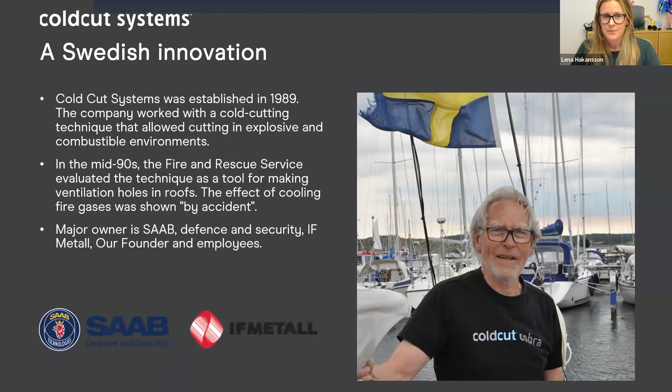Oh, that's two ahead. Sorry. Sorry, what's happening? Here we go.

So Coldcut Systems sells and manufactures the Coldcut Cobra, and we've done this for more than 25 years. So we have a lot of experience within firefighting, and the Cobra is used worldwide, though our main customers are within the fire and rescue services, and up to 90% of our users are within the fire and rescue services.

But Cobra is also used in airports and maritime environments, car production, and also where they put together the traction batteries, which we are going to talk more about later on. And Cobra is a tool to cool hot fire gases from the outside of the fire compartment. Sorry, it does not work.

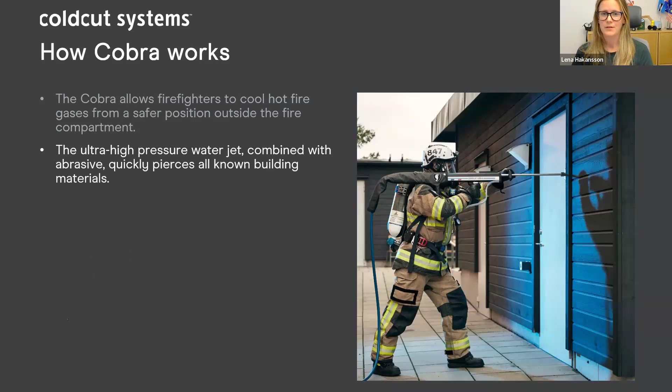So the ultra high pressure, it's 4,300 psi. This combined with the cutting media abrasive makes a quick piercing through all known building materials. And it pierces a very small hole, which allows for no extra oxygen to be added to the fire.

And once through, it makes a fine water mist that creates a large effective area that cools the fire gases very efficiently. And I'm sorry for this liters, but Cobra uses only, I think that translates to 15 gallons of water per minute.

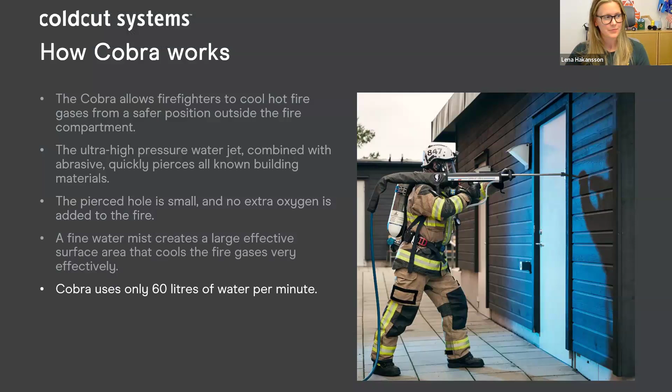So that water and abrasive mix travels through the hose to the handlance where the Cobra is operated, I should say. And number 5 is the control panel where we also can operate the Cobra. But mainly we use the control panel for starting the system. And we also have an emergency button. Additional or optional is number 8, the additive tank.

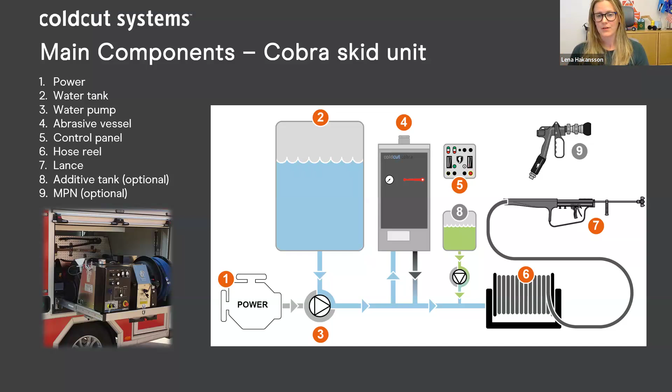And we also have the MPN, the multi-purpose nozzle, which is used for embers and smaller fires like car fires or trash can fires. The pressure is reduced from 4,300 psi to 1,200 psi, and we have 7.5 gallons per minute of water. So we have 2 different systems. One system that delivers 15 gallons per minute, and we also have a system that delivers 7.5 gallons per minute.

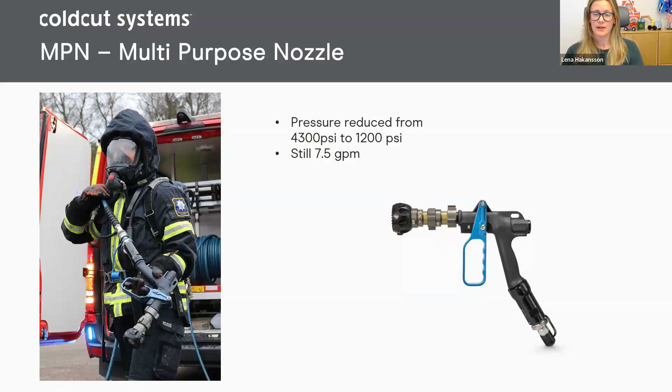We do also have training for our system, and basically it's the Cobra instructor course, where we do trainings for instructors. And when you finalize this training course, you become a certified instructor with the knowledge and ability to train your own crew to be Cobra operators. And after a certain time, you might want a refresher of the instructor training.

And also we have a Cobra captain course. We call it the incident commander course. It's more focused on risk assessment and decision making on how or when to use Cobra and why to use Cobra. And then our latest addition is the Cobra and EV battery fire course, where we of course talk about risks regarding EV fires and the potential to use Cobra as a tool to fight these kinds of fires.

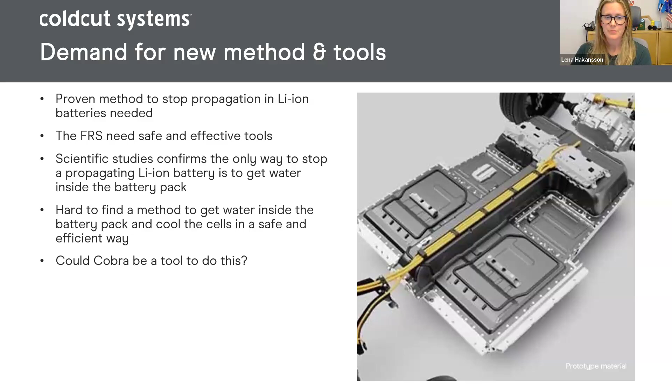So in 2021, we had initial tests that proved that Cobra could stop propagation by internal cooling. And we did these tests together with MSB and Volvo. And we knew that probably this method is going to work because more than 20 subsequent tests have been done by the EV car industry, and they had the same conclusion, that flooding the battery will stop the propagation.

And we knew that the test from this pre-study showed us that we had results that encourage more studies to be carried out. And as we see in this graph, as soon as Cobra is deployed, we reduce the temperature from 2,300 Fahrenheit down to 200 Fahrenheit. And whilst we keep on flooding the battery, we see a decrease in temperature over time.

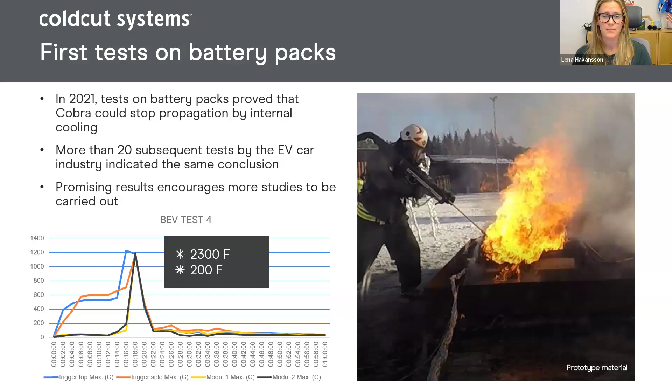So this was the only thing we needed to know that this is something that we should work more on, and we need more scientific proof to be able to make a method that is safe and efficient for the fire and rescue services.

So in September 2021, the Swedish Civil Contingencies Agency initiated a project where we were a part of, together with broad expertise. There were battery experts and car manufacturers and coach builders. And the purpose of this project was to find and communicate a method, a scientifically proven method on how to extinguish fires in electric vehicles. And we wanted to clarify the risks and explain the phenomena propagation. And the aim of the project was to spread the knowledge and create safety.

We tried different tools. This is Cobra, to try to cool the battery packs within the sub-pack. We aimed for a temperature to go below 120 Fahrenheit and stay there stable. And once we got the temperature down stable, we decided to end the operation and monitor the battery pack for approximately 15 minutes to make sure that the temperature did not rise again.

We did 3 tests on this sub-pack. All tests showed similar results. When we got water into the pack, we cooled the modules and we could stop the propagation. And the way that we verified that the propagation was stopped was 3 days later when we opened up the battery packs and measured the voltage remaining in each battery module. And as you see in the 3 pictures to the right, we still have voltage remaining in each battery cell.

Those battery modules involved in the fire have a bit less voltage than those that are not affected by the propagation. So from this, we could conclude that the method of flooding the battery does actually work. But does it work on a bigger scale?

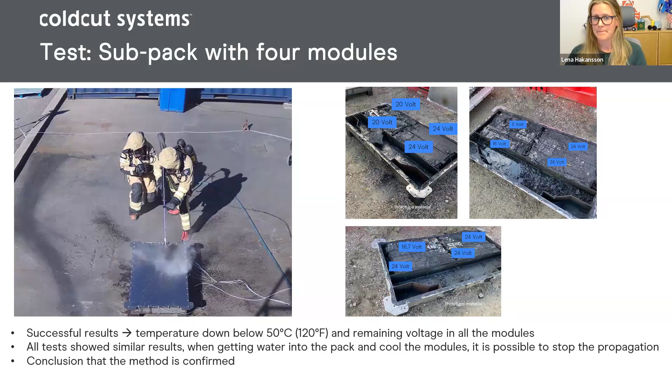So we tried on the battery pack with 24 modules. And as you can see, out of 24 modules, we have 17 modules that were still alive, so to say, they still had voltage remaining. The green ones still have voltage, and hence the red ones are, so to say, dead.

In one test we did, the total time of intervention was 14 minutes with the Cobra, and the total water consumption was 200 gallons of water. And yet again, we made the conclusion that the method is confirmed, since we did manage to stop the propagation.

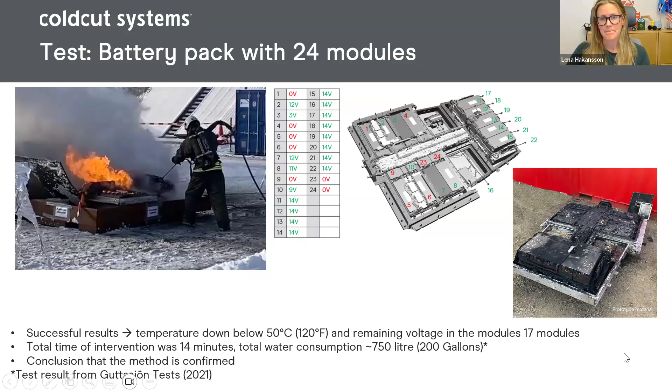Though we needed to know if this is an actual feasible method, even when we have the battery pack inside the electric vehicle. Because all of the other tests we did sort of on the surgery table. It was easy to access the battery, and we could angle the Cobra sort of how we wished. But once the traction battery is inside the car, you don't have that many access points. So to confirm that this method can be applied in a safe and efficient way, we tried it in a full-scale EV car.

And for this, we initiated the thermal runaway. And once we had the first sign that the thermal runaway was actually active, we waited for 15 minutes to mimic the time from alarm when somebody would call 911 to the arrival of the FRS. And by that time, we had a full car fire with the traction battery involved. And Cobra was used for a total of 5 minutes, and we used only 63 gallons of water.

And simultaneously, while we attacked with Cobra, we used a regular branch to primarily protect the Cobra operator from flames and smoke, but also to extinguish the rest of the car fire with the exterior and the interior plastics burning. The total amount of water used during this intervention was 200 gallons of water, and the total time of extinguishing was 10 minutes.

So in this test, we had a total of 27 modules. 22 out of these 27 were still alive, did still have voltage remaining. So yet confirming that this method is working. For all the tests, the subpacks, the battery pack in the full-scale test, we did wait for 3 to 4 days before we opened them up and measured this remaining voltage. And during that time, we lifted the battery packs, rattled them around, trying to provoke a reignition.

We never got one, but that is not a guarantee that the battery won't ignite, because it is still unstable. Once damaged or once involved in a fire, there is always a risk of reignition. However, we did not get one in any of our tests. We do know that a propagation can be stopped by flooding the battery pack with water. And that's how the method was developed, and I hand over to Carl to explain more about the method.

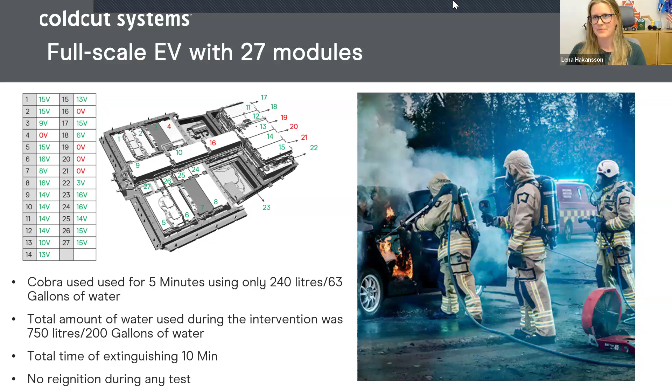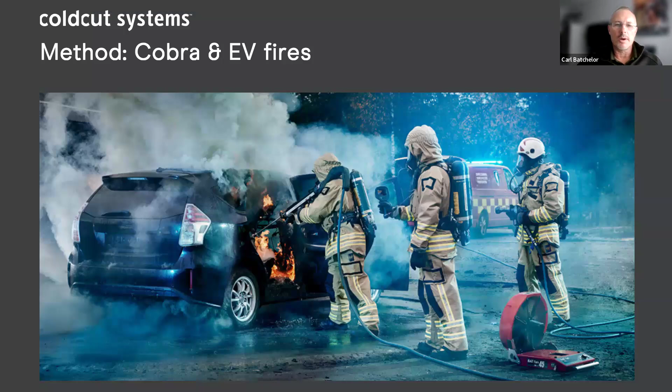Thank you, Lena. Okay, so we've seen the scientific studies that Lena's presented. Now we're going to look at how we actually approach dealing with an EV fire where the battery's gone into thermal runaway, from a practical point of view. Not all EV fires will involve the battery being on fire, and not all EV fires where the battery's on fire will involve the vehicle being on fire.

Now, most modern EVs we can recognize quite quickly. We all know what a Prius looks like. We all know what a Tesla looks like. We all know what a Rivian looks like. However, there are a number of cars out there that may be ICE vehicles, so internal combustion engine, or they may be an EV, and they might not be immediately obvious to us. So we might get mobilized to a vehicle fire or a car fire or a truck fire and actually not know it's an EV straight away.

So whether or not it's an EV, if the vehicle is involved, we're going to use our traditional methods for dealing with a vehicle fire. So it's inch and 3/4 line and 2 SCBA. We're going to put out the car fire as best we can. What we can't put out is the battery on fire, because the battery is contained within the battery casing itself. The analogy is just like putting water on a roof. Roofs are designed to hold out water. The battery casing is designed to hold out water. So we need to get water inside the battery pack.

Once we've confirmed it's an EV fire, and we've confirmed that the battery is involved, and we can tell that by the telltale signs of these low-hanging gases and vapors that are being pushed out from the vents in the battery pack. We may, if we get too close, smell a sweet kind of smell.

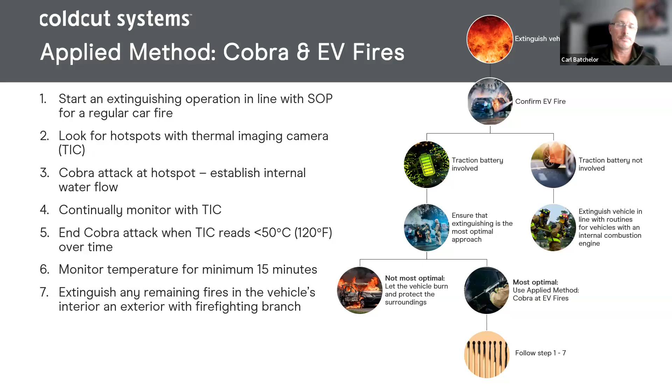There's a video now. The tests we did involved a Swedish car manufacturer who we're not allowed to mention. Use your imagination, I'm sure. So we set up a video using a Prius to show the kind of method we're looking at. The video is not perfect, but just watch the video and we can chat about that.

He'll shoot the Cobra through the floor of the vehicle. Start to reduce the temperature of the cells. Propagation. Right, scan again with a TIC.

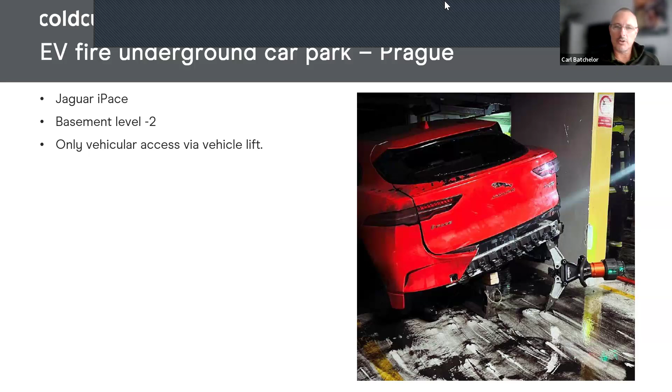They put the car on little transport dollies, because what we're trying to avoid is rotating the wheels, because the regenerative braking effect can actually put power back into the battery pack. So without rotating the wheels, by lifting it up, they pushed it into the vehicle lift. The only way of operating the lift was from buttons inside. So they actually put 4 firefighters inside the lift with the vehicle. That's how happy they were that the fire was out. And then took the vehicle up to ground level, pushed the vehicle out into fresh air. Again, another successful intervention using Cobra, and that was in Prague in 23.

A more recent one, and I do take a little bit of pride in this one, because Tempe Fire Department in Arizona bought a couple of Cobra units off us earlier this year. And I went out with a colleague of mine, Fergie, who I know is watching this presentation. We went out and we trained the Tempe firefighters in how to use Cobra. Now, we trained them specifically at their request about using Cobra on EV fires. But once we started talking to them about how we use Cobra in Europe and the United Kingdom, they were quite intrigued about what else Cobra can do. And I'll come on to that a little bit later.

What I can see there is visible flame. If I can see visible flame, I'm a lot happier than when I can't see visible flame. If you equate it to a liquid petroleum LPG cylinder or a flammable gas cylinder, if the gas is leaking without a flame, that's more of a concern to me than if the gas is leaking and it's on fire. In this case, I can see we've got a fire, so I'm less concerned about a massive explosion, although it's still hugely on my risk radar.

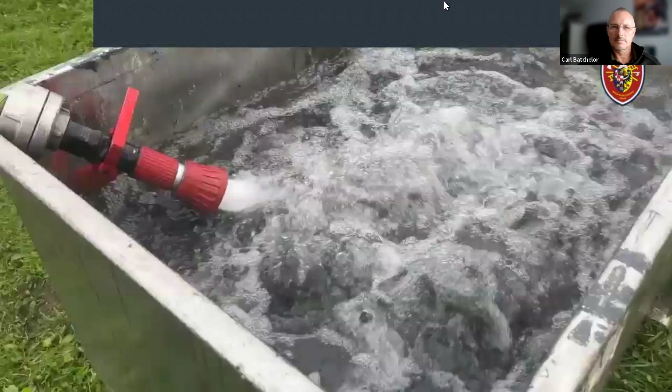Okay, so what you hopefully saw then was decent flaming combustion within the room that they went into downstairs in that house in the Czech Republic. If I see flames, I'm in a happier place than if I don't see flames. There's obviously less chance of an explosion because I've already got flaming combustion taking place. They tried to make the electric storage system a little bit safer before they moved it outside.

And when they moved it outside, what you saw then was them basically destroying every single module one at a time, so that there was nothing left of it, so propagation couldn't take place. And then you saw them take out the individual modules and place them in a bath just to be totally sure. But again, it worked well for them.

What we've spoken about so far is Cobra for use with EVs. There's a number of products out there that claim to deal with electric vehicle fires. Our product's been out there for about 20 years doing other stuff. We've now recently found out that actually it is a solution for EV fires. What I'm going to talk about now is the other stuff that it's capable of as well. Now I'm just going to play a short video which introduces you to Cobra and what it does.

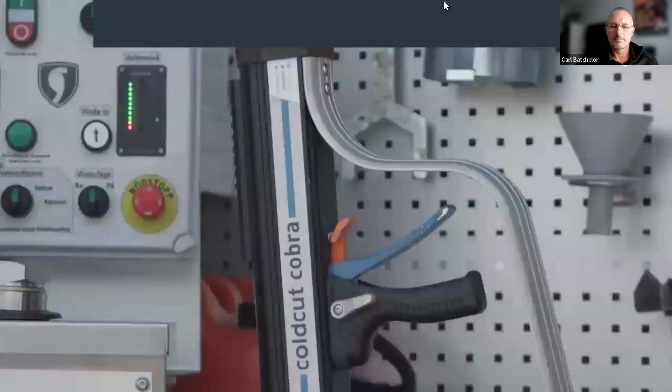Cobra is a firefighting tool used worldwide for decades. The Cobra is a component-based system that is easy to integrate into fire trucks of all sizes. Beyond municipal fire service use, applications include industries, airports, and maritime departments. Cobra is a firefighting tool that uses a lot less water than other firefighting tools.

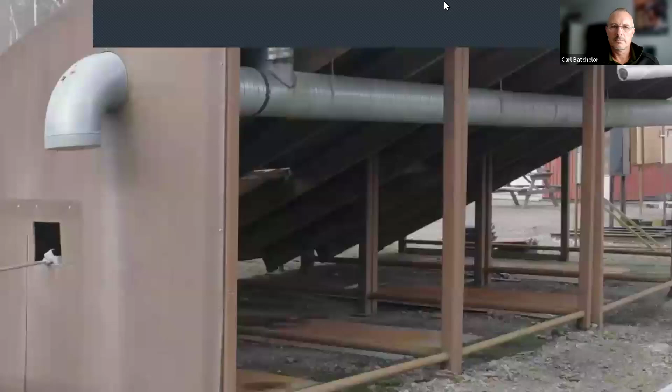With Cobra, the firefighter can work from a safer position outside the fire compartment. After finding the hotspots, the Cobra is deployed through the quickest access point. With Cobra training, you learn how to use the tool with the most efficiency. The ultra-high-pressure Cobra lance cuts through any known building material. After piercing the building, the water transforms into a fine water mist.

The surface of each droplet cools the fire gases very efficiently, and the high pressure generates a velocity of 200 meters per second by the nozzle, which creates a stirring effect of the fire gases in the room. Significant amounts of steam can be seen, showing the cooling effect of the Cobra deployment.

By reducing the heat of the fire gases and creating better visibility, Cobra creates better conditions for the firefighter to enter. They can enter the building with fewer risks and less exposure to harmful gases and particles. Most of the used water evaporates by the heat and leaves the building with very little, if any, water damage or contaminated water runoff that could run into nature and harm the environment.

200 meters per second is 447 miles an hour. That's how fast it comes out of the lance at 4,300 psi. You can see how far the trajectory is. It's ultra fine droplets of water, so therefore it has a greater cooling capacity than your standard sort of hose lines or even high pressure hose lines. I'm sure all you firefighters online have seen those images before.

So when I joined, it was the fire triangle. Now it's the fire tetrahedron because we've included the chain reaction part of it. And by us dealing with or reducing any one of those sides of that tetrahedron, we can then have an effect on the fire. So traditionally, we put lots of blue stuff on the red stuff. So we put water onto the heat, onto the fuel, which reduces the heat, therefore making that equilateral triangle less equilateral. So therefore, combustion is becoming less efficient.

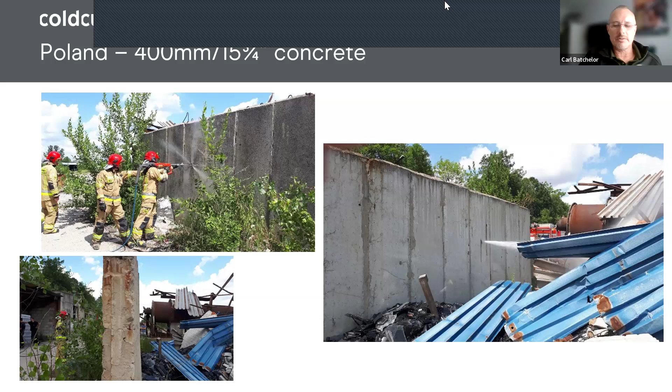There are 2 levers on the lance, one for water, one which introduces the abrasive as well. Once I've pierced through whatever material I'm piercing through, I can release the abrasive trigger and then just flow water into the fire compartment.

This video just makes you think about how we approach firefighting traditionally. So traditionally, we either go through the door into the room or through the window. Well, with Cobra, we can change that. The fire compartment becomes a 6-sided box. Not only can I go through the door or the window, I can go through the neighbouring apartments or the neighbour's house or the roof or the basement upwards.

You can see from that video there, that's just water mist going in there. That's just the water droplets being produced by the Cobra lance. There's no heat in there at all. So imagine all those tiny, tiny droplets of water being converted into steam and the expansion ratio you're going to get there, how that replaces the oxygen in the room with water mist, reducing the chance of combustion taking place and also having that cooling effect as well.

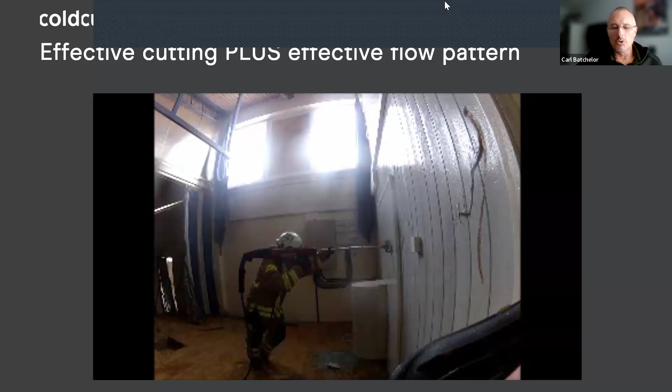This video is showing you going through about 3 layers of drywall. So it will pierce through the first layer. The jet will sort itself out, go through the second layer. It will then sort itself out, going back to a small jet again. And then once again, ultimately, getting water mist into the fire compartment.

You can see, even through all those layers of drywall, we're still getting a decent water mist being produced in the actual compartment where we want it. This is a video of a standard sort of demonstration that we do, and we did one of these in Oregon the week before last. Virtually identical container loaded with plywood and pallets and some straw at the far end.

The bit of wood you can see there on the left-hand side, that's just what we call a sacrificial panel. That saves us having to pierce through the metal door all the time. We can if we want to, but there's no point in peppering the metal door full of holes. We can just go through the sacrificial panel, and when that's pierced enough, we can just change that out and get a fresh one in there. It also means we don't need to use abrasive for training, so that just cuts down wear and tear and cost as well.

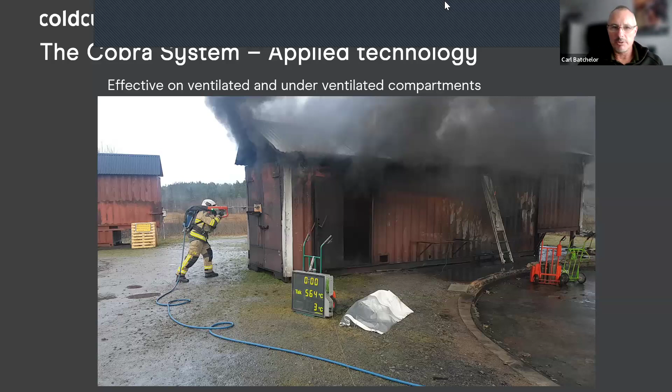Initially, I'll get some turbulence in there as the room sort of sorts itself out. The door is open as well, so you might get a little bit of oxygen drawn in, but not a lot compared to the amount of steam we're going to produce. The key thing is just keep an eye on the temperature and the colour and the buoyancy of the fire gases.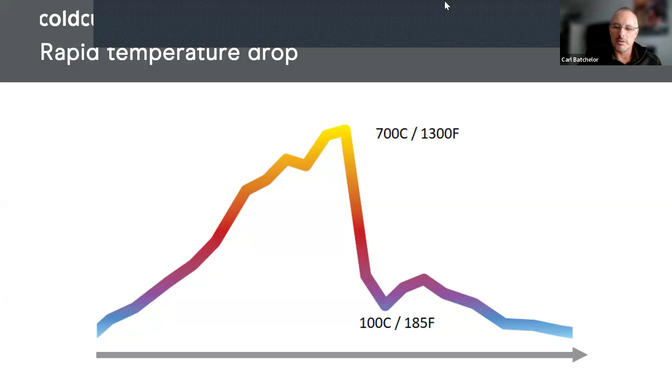We're losing too many firefighters. There's no excuse for losing firefighters in the line of duty. We need to think about the way we're doing things. So if we can remove the hazard, replace the hazard, isolate people from the hazard, change the way we do things. Two things firefighters don't like: change and the way it is now. And I got that from one of the American colleagues, and it's so true across the world. But we have to have an open mind on how we're dealing with fire nowadays.

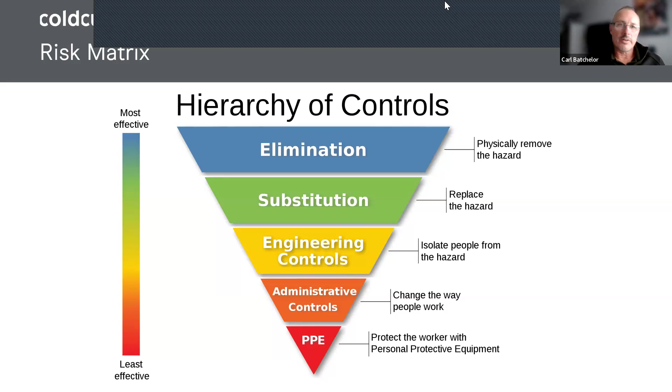Another reason for that is because the World Health Organization has categorized our occupation, firefighting, now as a group 1 occupation, which means it is carcinogenic to humans. We probably will get cancer. We're now 4 times more likely to get cancer than the rest of the general public. And that's because of the conditions we are working in regularly.

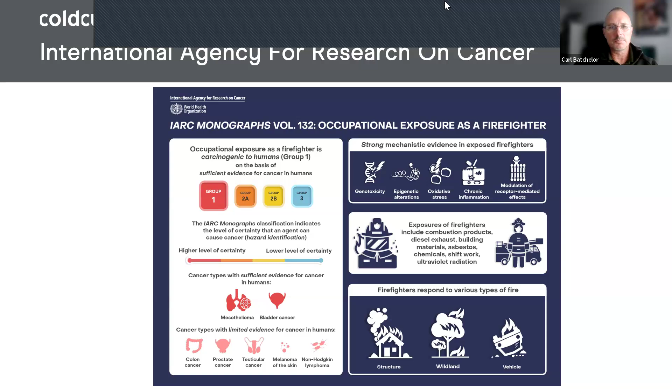I know we're all moving to clean cab policy, turnout gear used once, all very, very expensive methods and very expensive to administer. If we can avoid contamination in the first place by thinking about other ways of doing things, it stops that and it saves some money as well. Cobra is not a tool used in isolation, and it's not a tool used for every incident either. It's a tool on the fire truck or a tool in the toolbox. Some incidents you'll go to, you might use it, others it might not be suitable.

Now for this incident here, we've got a timber framed building in Sweden, very similar to some of the timber frame buildings in the US. With a naked eye, I can't really see where the fire is. I've got a pretty good idea. I can see some smoke coming out of the building, but using thermography, using my thermal image camera, I can see exactly where I need to pierce with the Cobra lance from outside. It's only going to make it better. It's not going to make it any worse by me introducing water mist into that attic space, into that loft space. It's only going to make it better and safer.

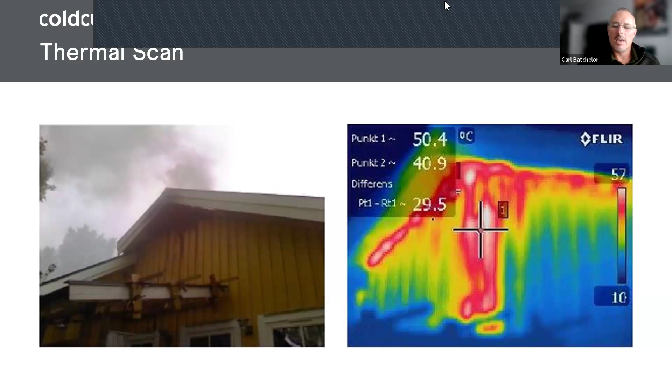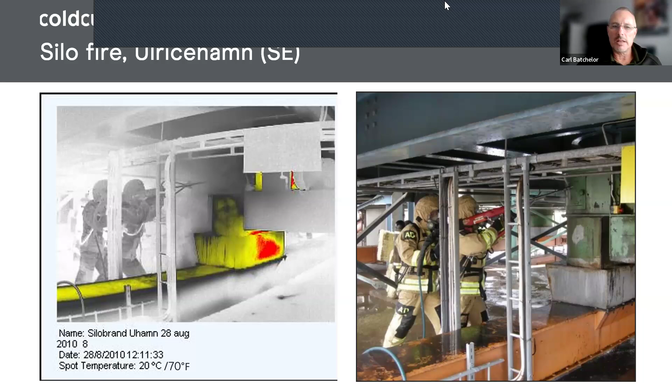We can see using the thermal imagery on the left-hand side that actually where the lance is piercing now, it's much cooler inside that ducting work. What they need to do now is reposition the lance a bit lower down just to hit that hot spot down there. The same in this one here.

So for silo fires, ducting fires, Cobra's a really good solution for any areas where you don't want to or can't send firefighters. Instead of having to cut access holes in a silo, a grain silo, just use Cobra. There are many ideas of where Cobra can be used that we haven't even thought of yet. And this is one of the ones I hadn't thought of.

This is one we learnt about in Scotland, up in the north of the UK. So Scotland just sits above England in the United Kingdom. They used it for deep-seated peat fires. So they have peat fires that burn underground, about 3 feet underground, which are really difficult jobs for us.

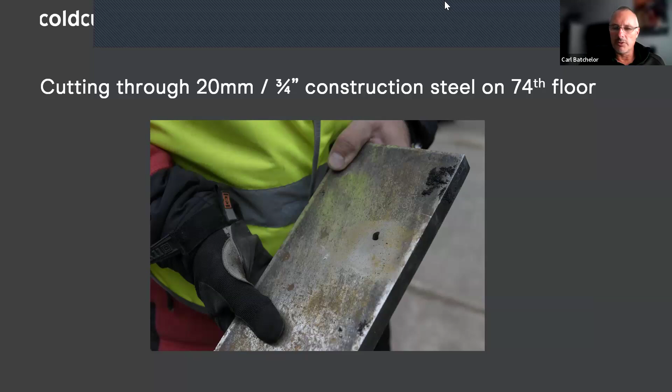We were cutting up on the 74th floor using 830 feet of hose. And it was still effective enough and still powerful enough to pierce through structural steel. And that's the hole there you can see. So we've cut through 3/4 inch of structural steel on the 74th floor using 830 feet of Cobra hose.

That is me done, I think. So I'm going to try and get back into the presentation. Well, I have to tell you, first of all, I need to apologize for my computer this morning. Fortunately, the people at our tech center answered the phone as soon as I called, and he helped me get back online. I don't know what happened. He doesn't know what happened, but we got it fixed. So we're going to go through.

I'm going to start with the Q&A that we have right now. And some of these have been answered. I'm going to take the open ones right now. So the first question comes from Rich Chappie Bauer. Does the water escaping out of the batteries contain toxic elements needing hazmat intervention? Can we take that one, Lena? Yeah, please do that, and I can fill the gaps.

Yeah, so all vehicle fires, whether they be ICE vehicles or lithium-ion battery-powered vehicles, will contain toxic elements. I've been going to car fires for nearly 40 years now, and I'm embarrassed to say that in the old days, I used to put out car fires just holding my breath without any SCBA, because we didn't realise the toxicity of the gases and vapours being driven off from a car fire, and again, the water runoff from a car fire.